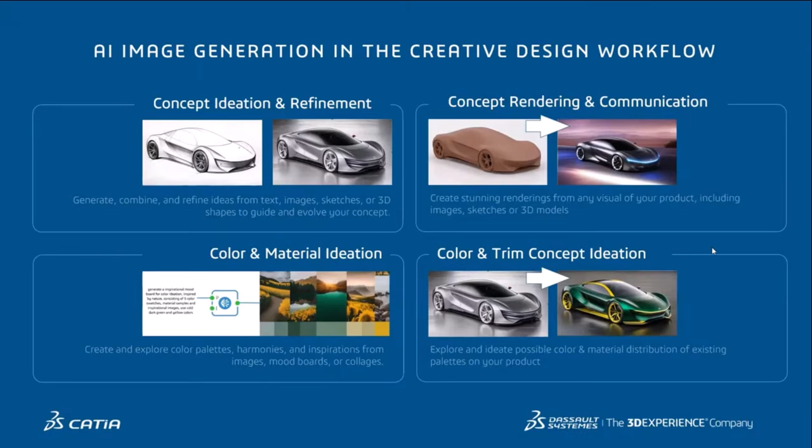As of today, we can fulfill 4 use cases. First, concept ideation and refinement, meaning you can turn your very early design idea into something more detailed to estimate where you're going. You can do concept rendering and communication, turning your early design concept into stunning visuals. You can do color and material ideation to get some nice moody images for mood boards, or color and trim concept ideation to apply colors with AI directly on your product to ideate where you're going. And how do we do that?

There are 2 approaches to AI image generation. First, the simple one to generate images from a panel. That's good if you just want to generate single images, and there are different styles you can use. You can in-paint on an existing image, or turn existing compositions into something else.

For more complex image generation, we have a node-based approach. Here you can see the nodes in the panel. You drag them onto your canvas, put in a prompt, change some settings, and then generate your images. The nice thing about this approach is that you can iterate on it.

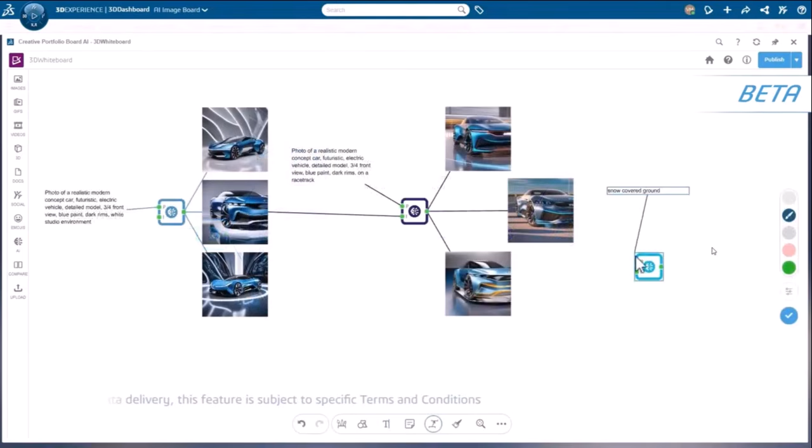Here I use an image, plug it into a node, and turn the composition into something else. If I now want to edit the image and change something, for example the floor, I just point it out and plug it into a node. And now you see I've changed the ground.

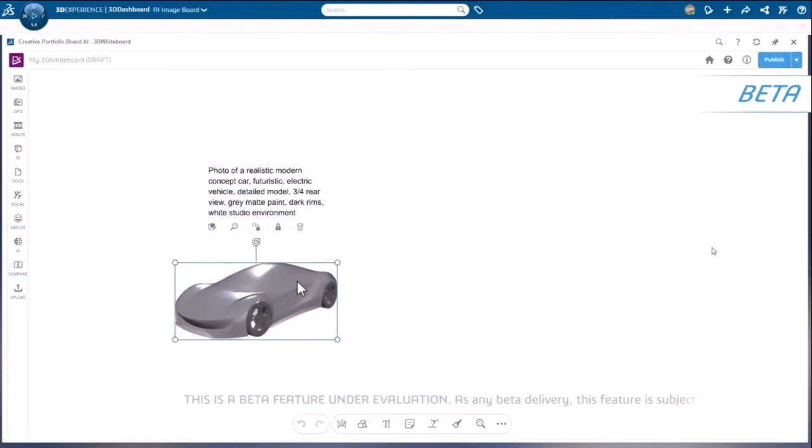Since we also have access to 3D space, we can bring in any 3D model we want and use that directly as AI input. So here we just plugged it right into the node and we get some images.

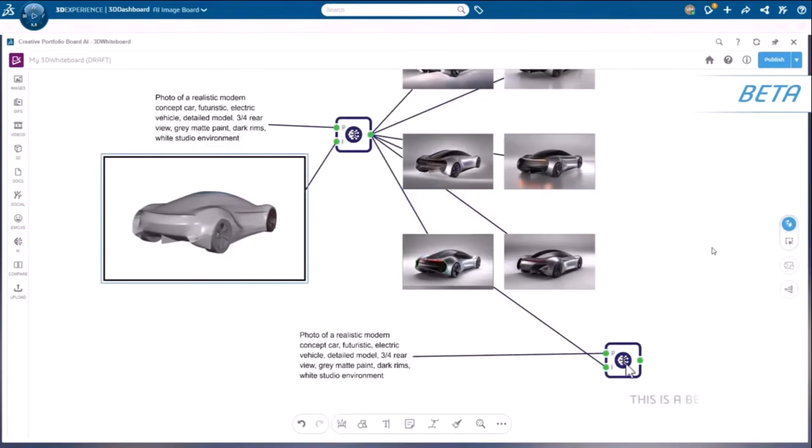Now I want to iterate more on my design, so I just draw on top of my image and use that as new AI input. AI will take my idea and turn it into an image.

Since we are in Creative Portfolio Board, we of course have access to all the other nice features of the app. So we can auto-arrange our images, or compare the different design variations that AI gave us.

Now that we've talked about AI, I also don't want to miss out on the other news for the Creative Portfolio Board app. In 26x GA, we also offer some new templates, and there are different kinds now: mood board templates, and general whiteboard templates.

The mood board templates are extremely helpful when you're working on a color concept. You can choose from a selection of ready-to-use templates, bring them onto your canvas, bring in your own images, refine the colors and layout a little bit, and pick your own colors for your own color palette. And there you go — you just made a nice mood board.

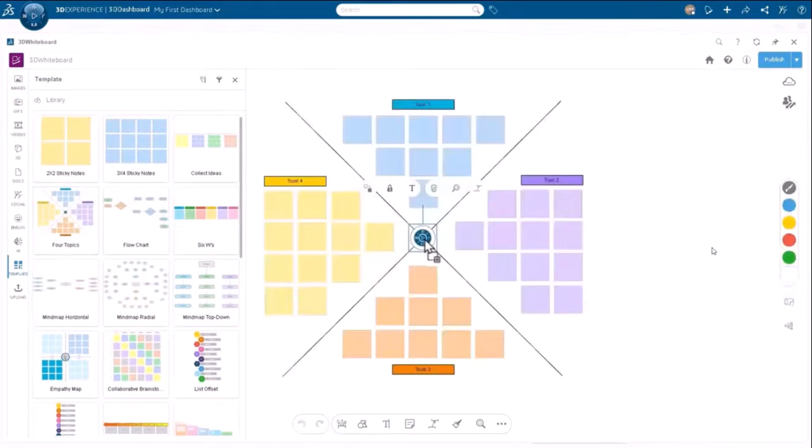The other sort of templates we offer are basic whiteboard templates, just to keep some visual consistency or speed up your process. You can choose from a variety of ready-to-use whiteboard templates, all kinds of stuff you might want to use in your project, and drag and drop it onto your canvas. And there you go, you can start right away.

Well, a very inspiring new set of capabilities in the Creative Portfolio Board application. And after the inspiration, it's time to go into the creative process based on our new and innovative application, Creative Design Experience, which is meant to serve the needs of you, creative designers, concept modelers, to explore your creativity from the sketching phases up to the very advanced concept modeling process, by mixing 3D sketching, 3D sculpting solutions, technology, and connection to science-based applications.

It's time for me to give the floor to Aude to present the application and what's new in the release. Thank you, François.

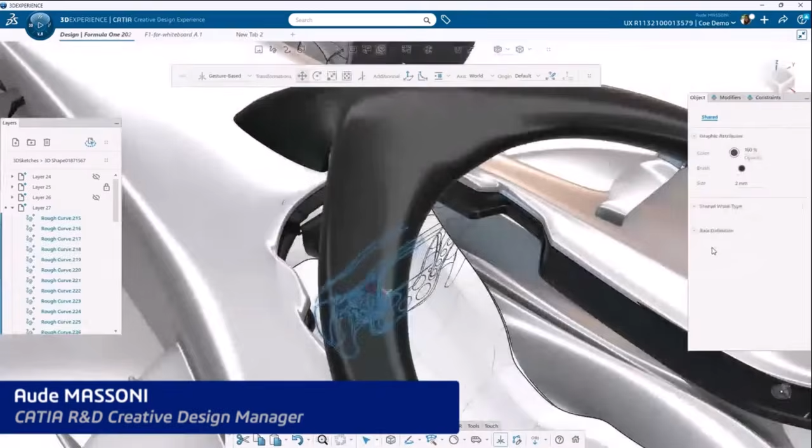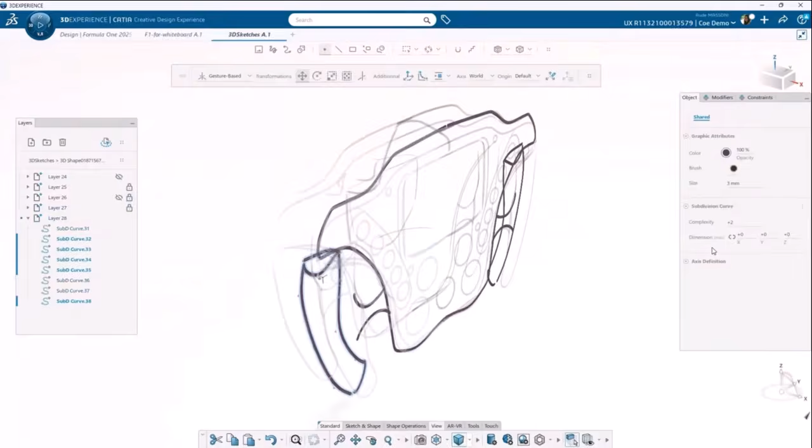So here is the new subdivision curve technology. With them, you can quickly build CATIA curves with a sketch as a reference. If we focus on the handle, you see I'm able to sculpt curves and modify them with the gesture-based robot and transform them into 3D curves.

So the next step would be to use the concept modeling tool on top of it, and you'll discover more in the What's New content you are about to see.

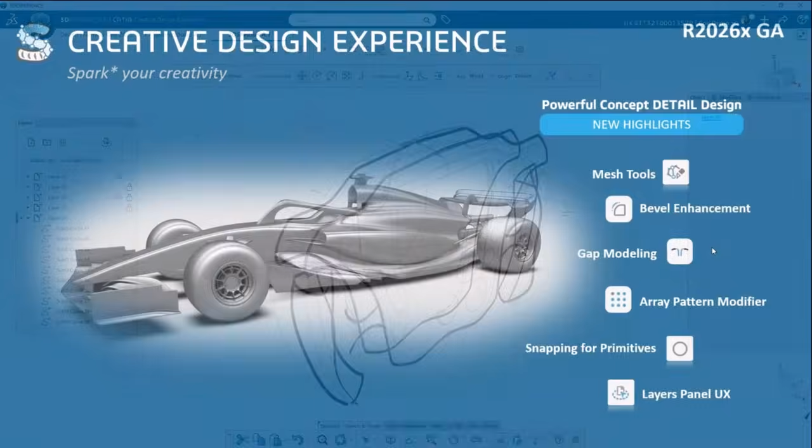So now let's deep dive in the 2026x What's New release. You will discover new announcements that are coming to enrich our design application. First, I'll give the floor to Franck, so he will talk about the first key highlights.

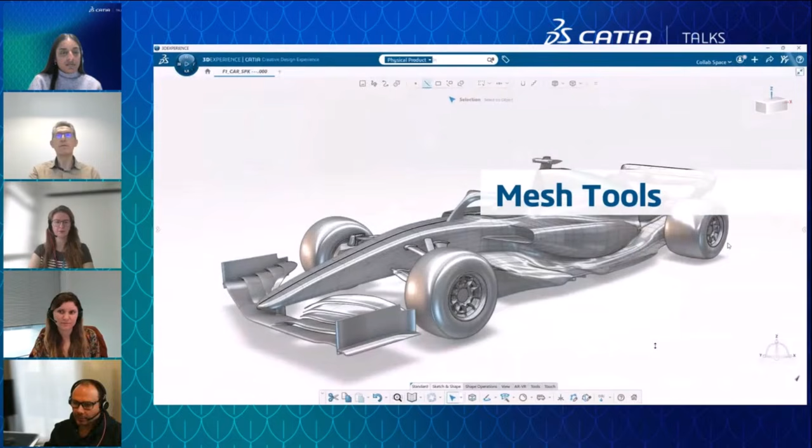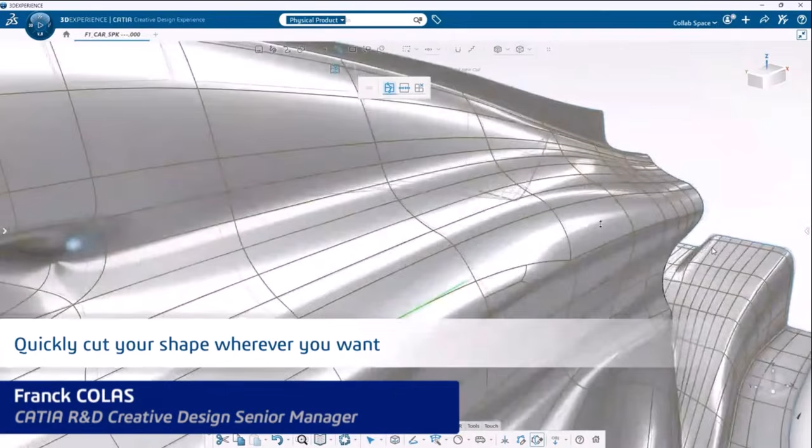Thank you, Aude. And the first key highlight is the mesh tool, the introduction of the mesh tool in creative design experience, to give you more freedom and more flexibility during your modeling phase. It allows you to cut your model, your shape, wherever you want. No need to add the full loop totally, and you can also cut the model.

In this example, I have a triangle, and as I prefer to have quad, I decide to use the mesh tool to transform my triangle into a quad. And you can continue your modeling phase by using other tools in creative design experience.

We also introduce the merge command. You merge your vertices wherever you want by sliding on the edge, or using the snap point on one of those vertices, or directly in the middle of both vertices.

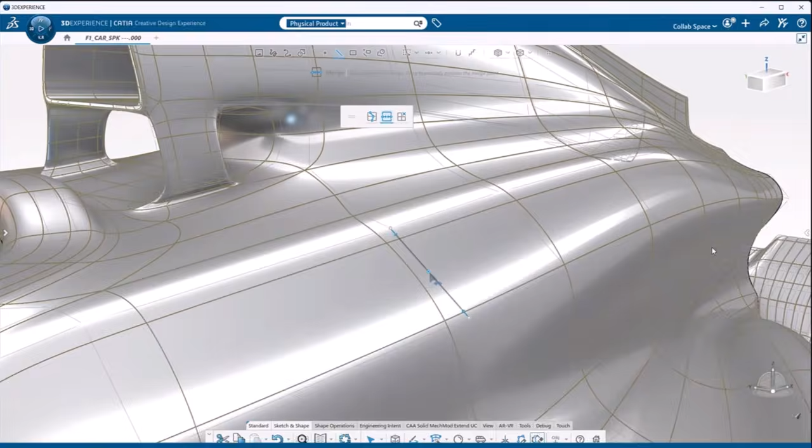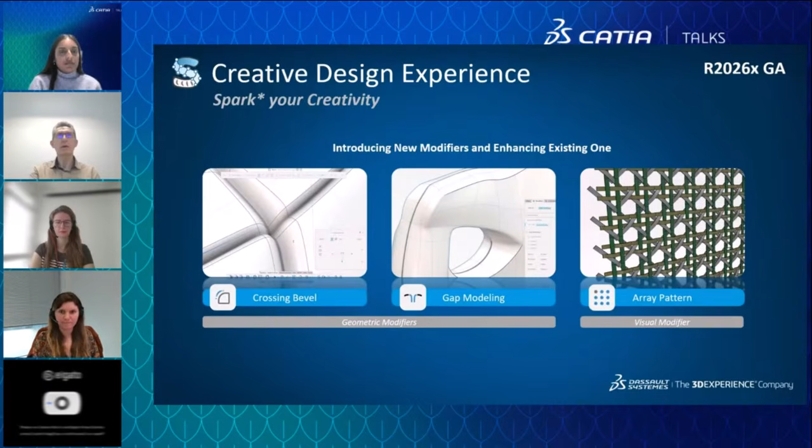A quick view of new modifiers or enhancements on one of those modifiers. Let's start with the crossing bevel and an enhancement on the bevel command.

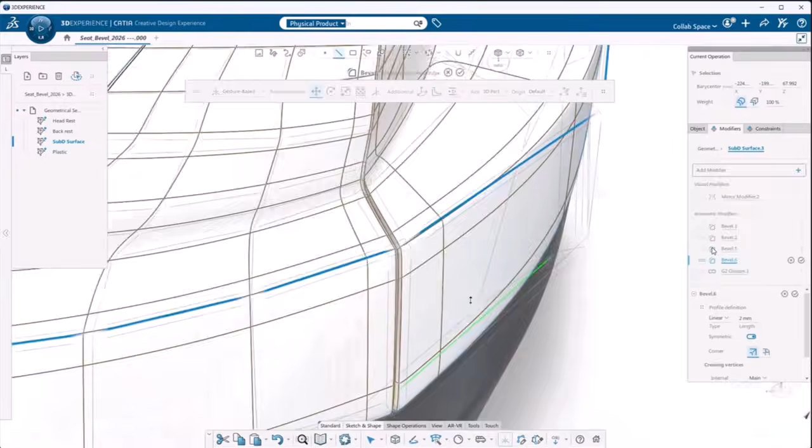As you know, you can already enrich your model by using the bevel modifiers and use the dedicated panel to directly modify the profile and see the result in real time on your shape. And now we enhance the bevel with the capability to cross another bevel.

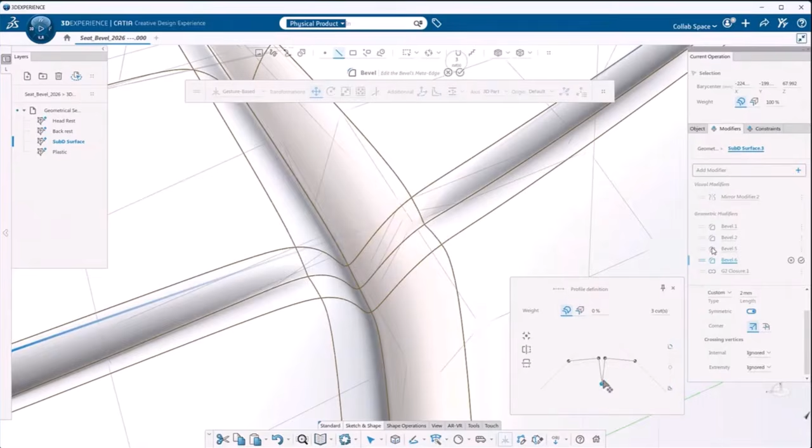Here, you create directly a new bevel, and by using the dedicated option in the panel, you can control the behavior of the cross bevel. It works also the same way with T-junctions.

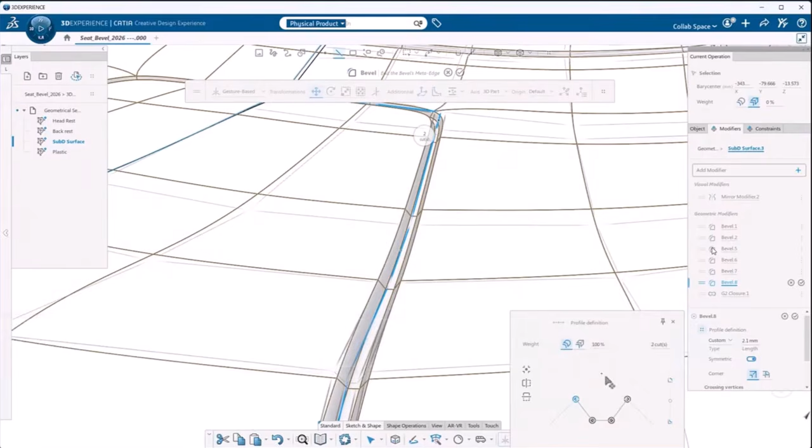And we also improve the bevel more generally with new options, like the symmetrical command to create quickly symmetrical bevels, and also the possibility to add weights on each vertex of the profile.

Now I give the floor to Aude. Thank you, Franck. So we are also introducing a new geometric modifier that we call gap modeling, which makes it possible to generate gap details directly on subdivision surface models.

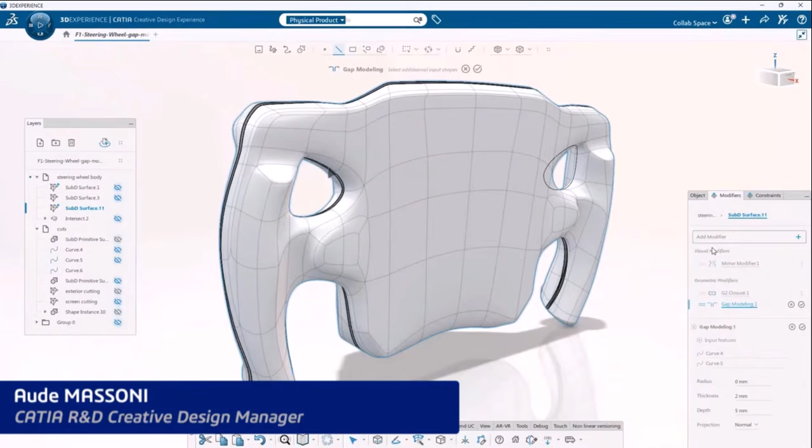So in the steering wheel example, you can begin by simply selecting a set of curves that define the path of your final gaps. From the modifier panel, you also access and control different parameters: the thickness, the depth, and the fillet radius of the outer edge of the gap. Because it's a modifier, everything will stay fully editable all along the design process.

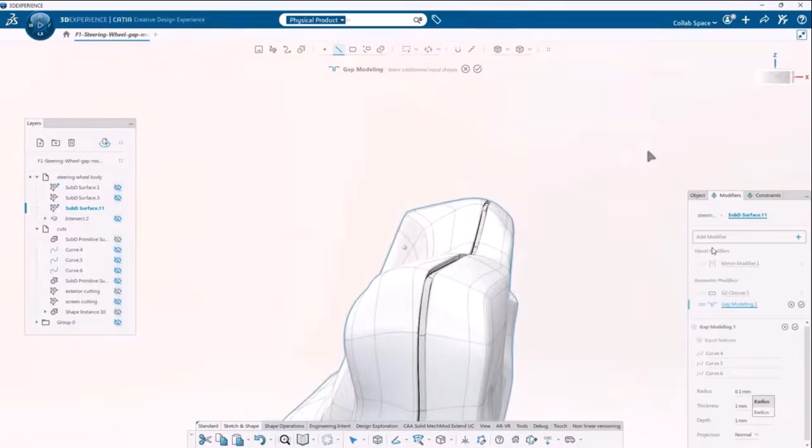For example, at some point, you can add new cutting inputs to the same modifier. Here, you can show a new subdivision surface to define, for example, the opening for the steering wheel display. At any moment, I can insert these new surfaces, and you will see it will take back the same parameters as the overall other gaps.

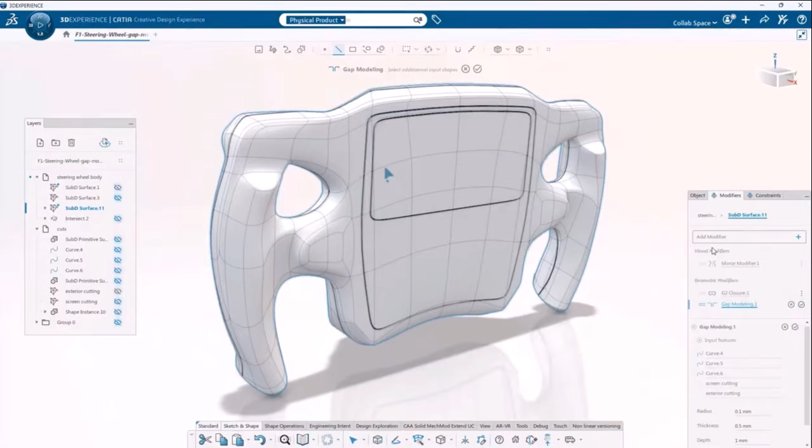At any moment as well, thanks to the associativity between all features, you can bring back some input surfaces and modify them with the manipulation tool. So here, I select some vertices of the surface, and you will see that with the gesture-based, I can simply scale them and visualize the modification that will be updated automatically afterward.

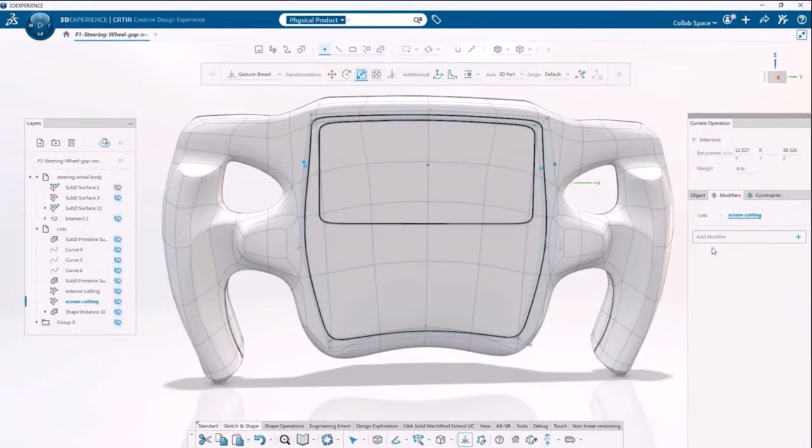So it will save a big amount of time during the design process. Instead of building each gap manually, you can here focus on exploring the design variation you want, and simply adjust the parameters and switch inputs. It's, of course, faster and more flexible for your workflow.

Let's look now at the new array pattern modifier. This is a visual modifier that will allow you to instantly create array patterns on a single element or across an entire layer of elements.

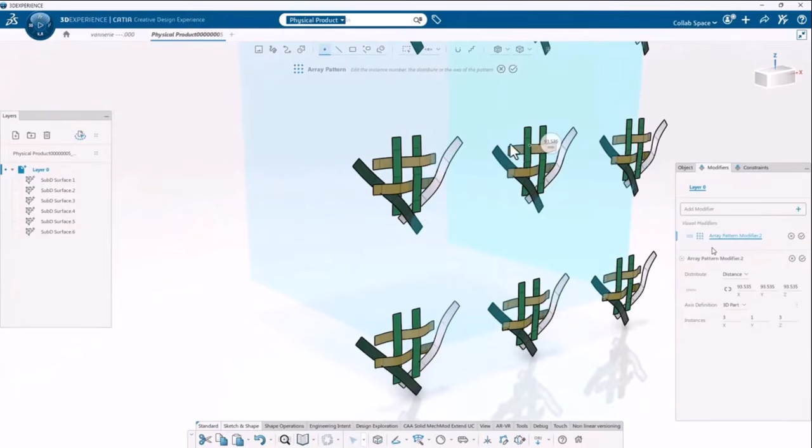In this example, I want to quickly visualize a weaving pattern, so I'm applying the array pattern modifier on my layer. I can directly manipulate the pattern using the enclosing box in 3D to define the size, or go inside the modifier panel to precisely control the step value between elements.

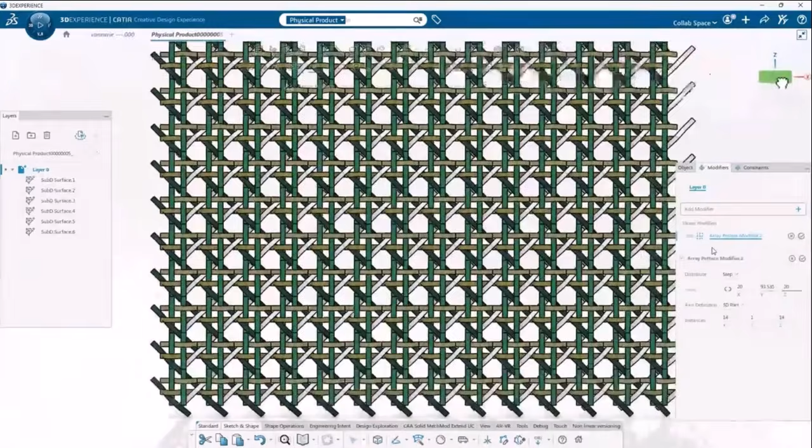I can extend the pattern in 3 directions. Here I will only need 2. Once I'm satisfied with the design, I can scale up the number of instances from just a few up to 2,000. In this case, I will use 14 instances, which is enough to validate.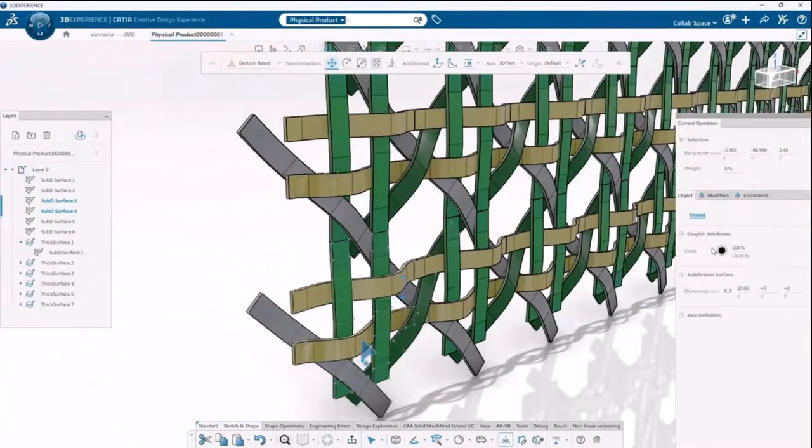The main advantage here is, of course, the performance. Because it's visual, it's very lightweight, and it will allow you to handle very complex patterns with interaction. Here, I want to update just one part of my pattern, and you will see that it benefits the overall pattern — you can update everything live. I think it's a huge benefit during the creative phase when you are exploring ideas.

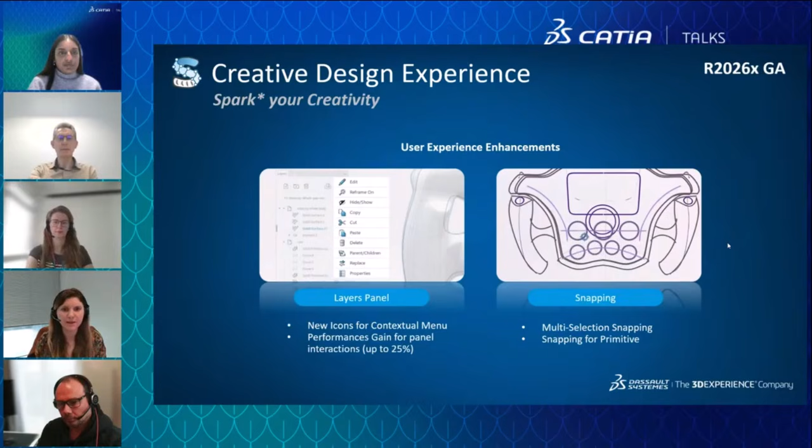Now let's look at some enhancements in terms of user experience. First, focus on the Layers panel, where we enriched the contextual menu, now with icons in addition to text, so it's easier to navigate visually in the panel. We also worked a lot on the performance of this layers panel, and you will notice that when you do hide/show, it will be really fast.

Now let's talk about snapping. We now propose multi-selection for snapping. For example, you can select different vertices and snap them onto the same target together.

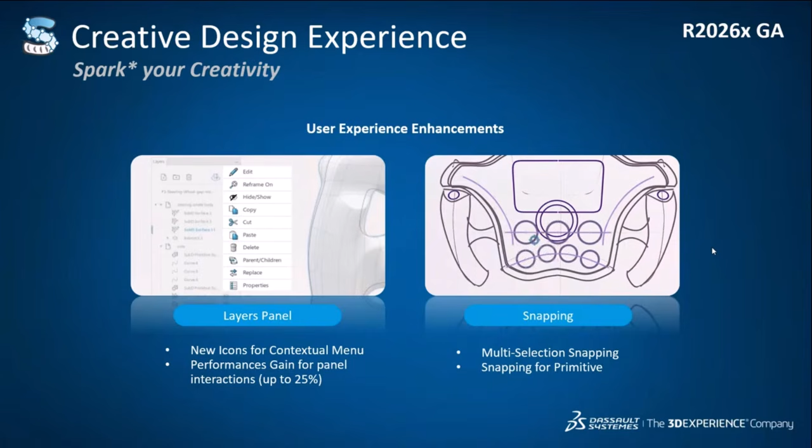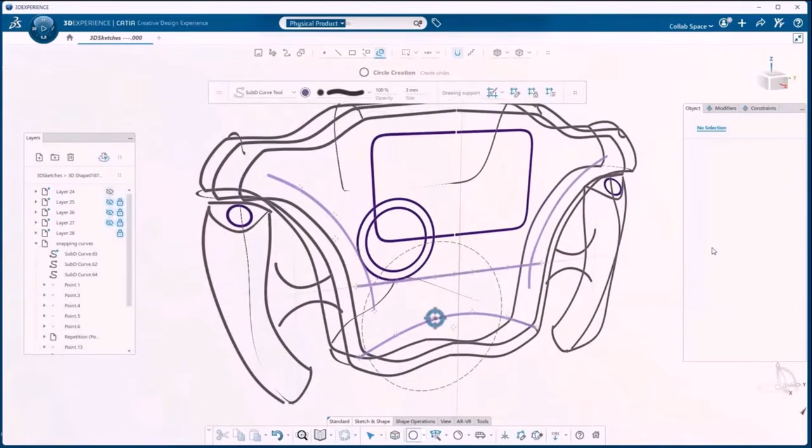I want to present a video about snapping for primitives, which is also a nice announcement for your creation workflow. When using the primitive creation command, there is now a new shortcut to activate snapping with the M key. Once enabled, you see snap targets appearing around your cursor, and you're able to snap a primitive like a circle directly onto existing vertices, curves, or points. This makes it much easier to create multiple primitives along different paths with precision and consistency.

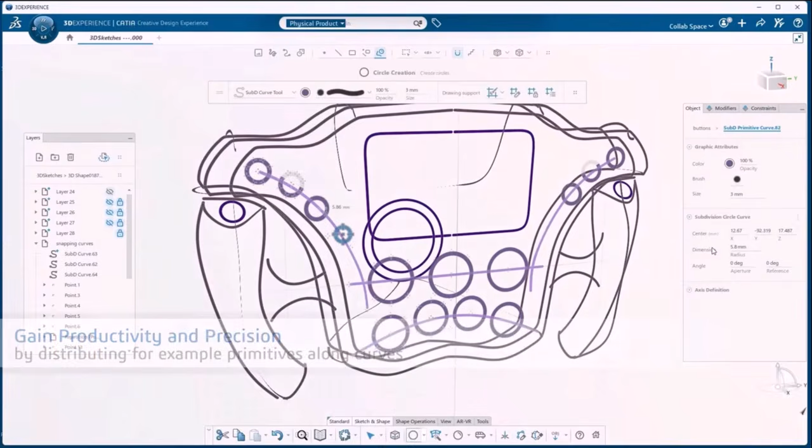Can we have the next?

Here is a quick takeaway of the new functionality in Creative Design Experience for this 26 GA release: more control and productivity with the mesh tool and gap modeling modifier, and also advanced modeling commands with the crossing bevel and the pattern array visual modifier. Now I will hand back to François to continue on the Imagine and Shape application, what's new.

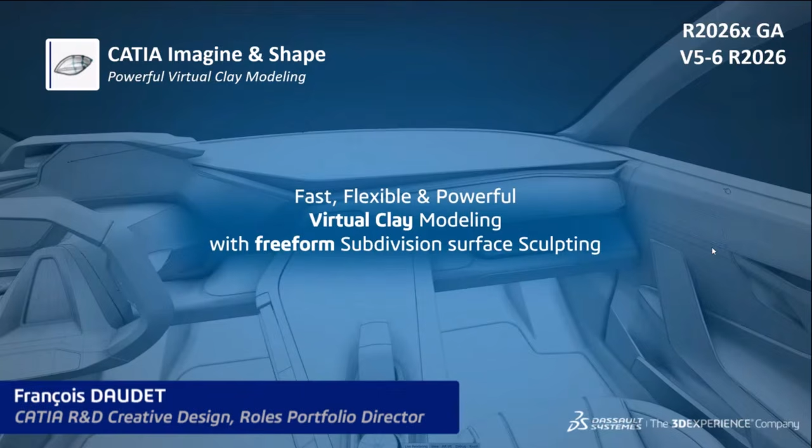As you all know, Imagine and Shape is a widely deployed application serving the needs of concept modelers based on the virtual clay modeling approach, taking full power and benefits of subdivision surface technology. This application has for many years been evolving mostly based on customer production requirements, serving our users whether in the V5 environment. This year we are providing new capabilities for the V5-6 R2026 release of CATIA V5, but also for customers using the 3DEXPERIENCE R2026x GA release.

I will ask Franck to introduce the main two highlights of Imagine and Shape in those releases.

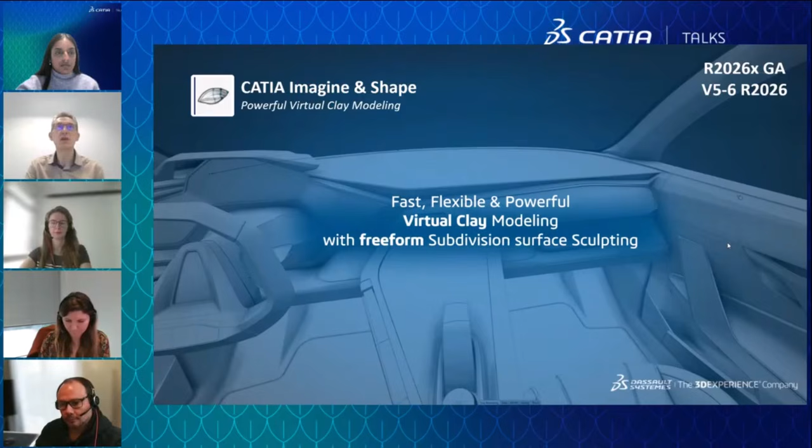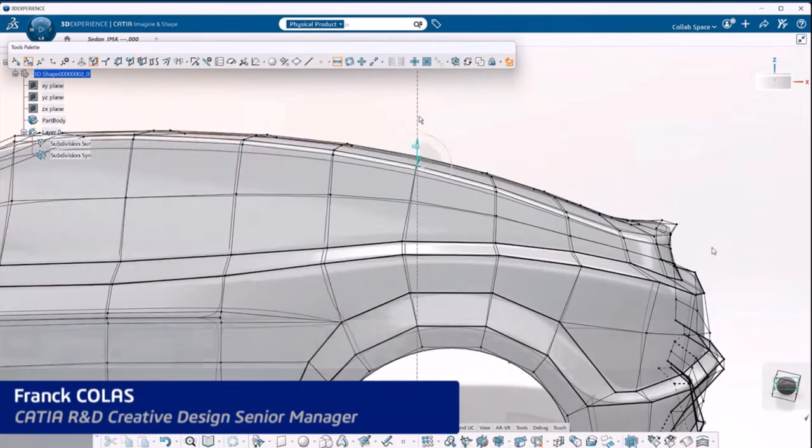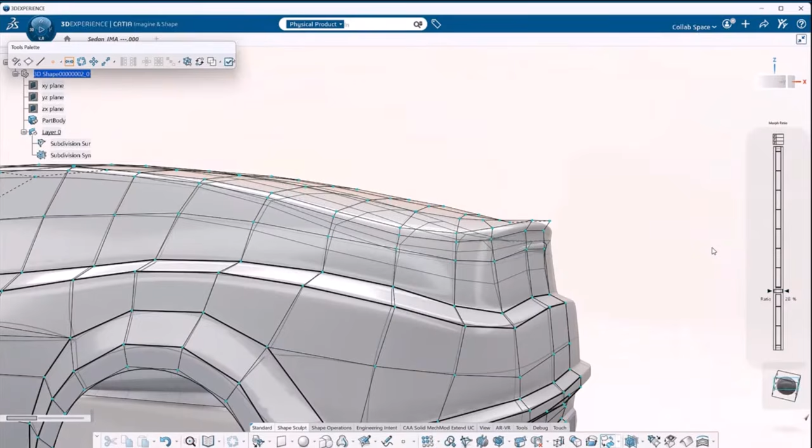Let's start with the morphing command, a new command in Imagine and Shape. When creating a shape, sometimes you want to make modifications without losing the first shape. By using the morphing command, when you enable it you decide to keep this shape as state 1, and by modifying directly with the tools of Imagine and Shape, you create state 2. Once you have state 2, just by using the slider, you are able to navigate between both states of your shape and decide which one to use, or find the best compromise between both shapes.

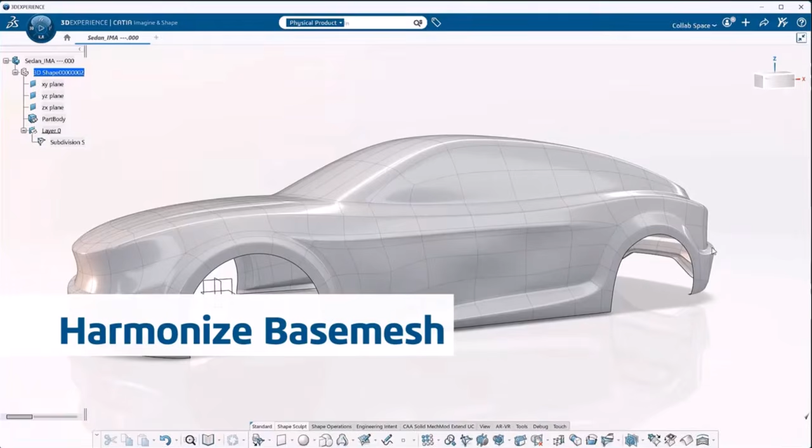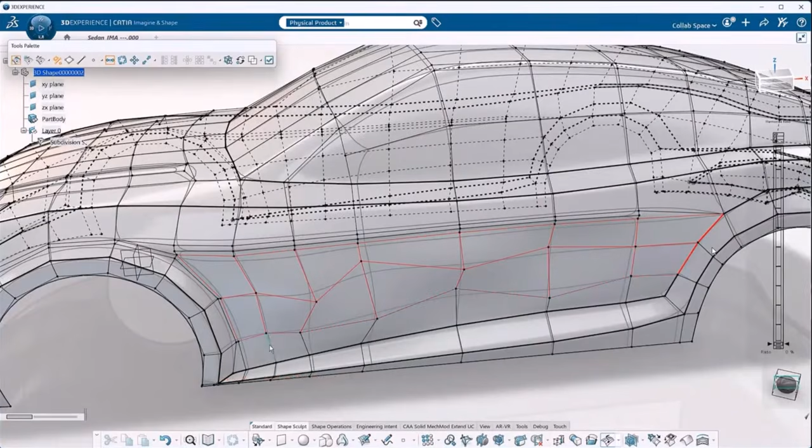And the second enhancement is on the quality of your shape. When you create a shape, sometimes you have noise on the shape, vertices not in the right place, etc. We can see an example here. By using this new harmonize command and selecting the grid gathering of faces, I'm able to use the slider.

I'm able to regularize and harmonize the base mesh to quickly improve the quality of the shape. And that's all for me and for Imagine and Shape. I give it back to François.

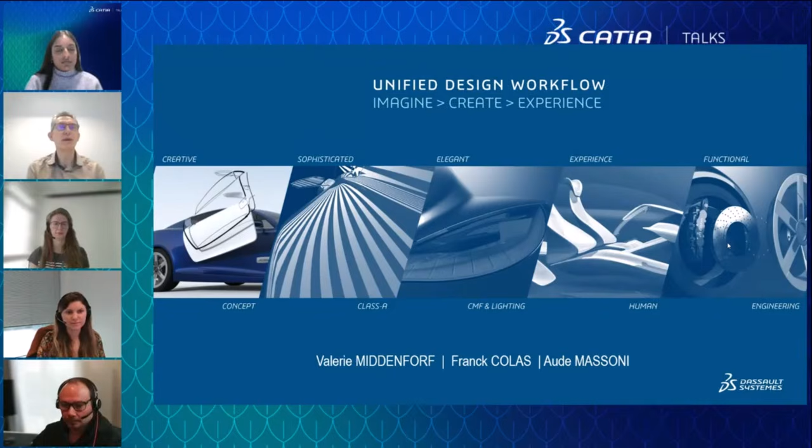Thank you all for the discovery of these new capabilities we offer in our portfolio for you, creative designers and concept modelers. We hope you enjoyed it, and we stay tuned for any questions you might have.